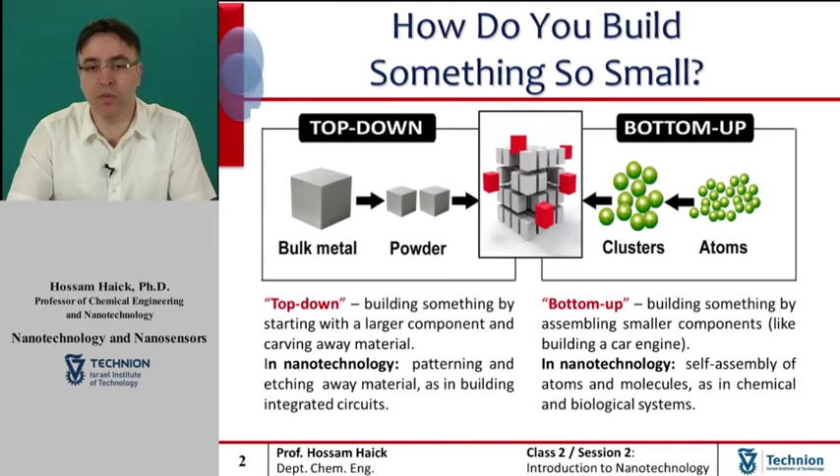Such bottom-up approaches should, broadly speaking, be able to produce devices in parallel and much cheaper than the top-down methods, but could potentially be overwhelmed as the size and complexity of the desired assembly increases.

Focused ion beam, also known as FIB, is a technique used particularly in the semiconductor industry, material science, and increasingly in the biological field for site-specific analysis, deposition, and ablation of materials.

FIB systems operate in similar fashion to the scanning electron microscope, which we have abbreviated so far by SEM, except the fact that FIB systems use a finely focused beam of ions, usually gallium, that can be operated at low beam currents for imaging or high beam currents for site-specific sputtering or milling.

At low primary beam currents, very little material is sputtered, and modern FIB systems can easily achieve 5 nanometer imaging resolution. At higher primary currents, a great deal of material can be removed by sputtering, allowing precision milling of the specimen down to a sub-micrometer or even to a nanometer scale.

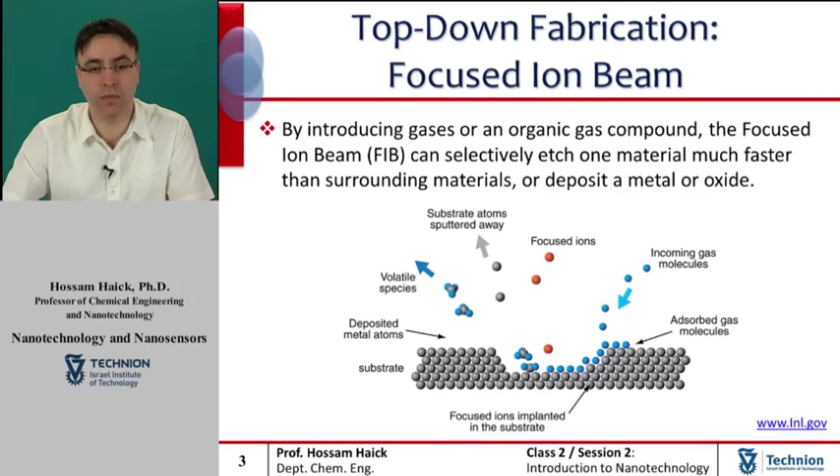If the sample is non-conductive, a low-energy electron flood gun can be used to provide charge neutralization. In this manner, by imaging with positive secondary ions, using the positive primary ion beam, even highly insulating samples may be imaged and milled without a conducting surface coating, as would be required in SEM.

Following is a short video that demonstrates the FIB operating along with animated presentation. Enjoy.

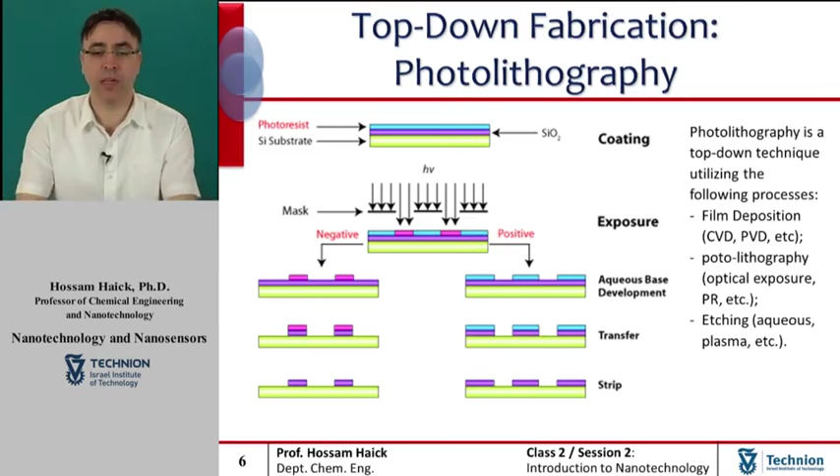Its main disadvantages are that the technique requires a flat substrate to start with. It is not very effective at creating shapes that are not flat, and it can require extremely clean operating conditions. Following is a short video that demonstrates the photolithography process along with animated presentation. Enjoy.

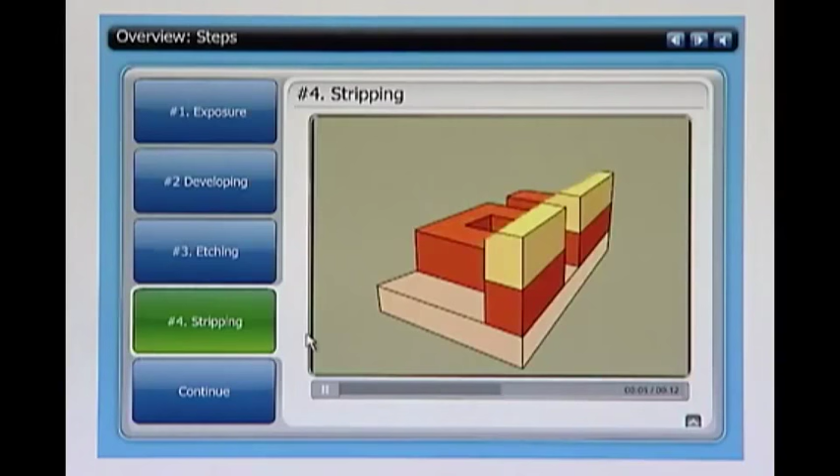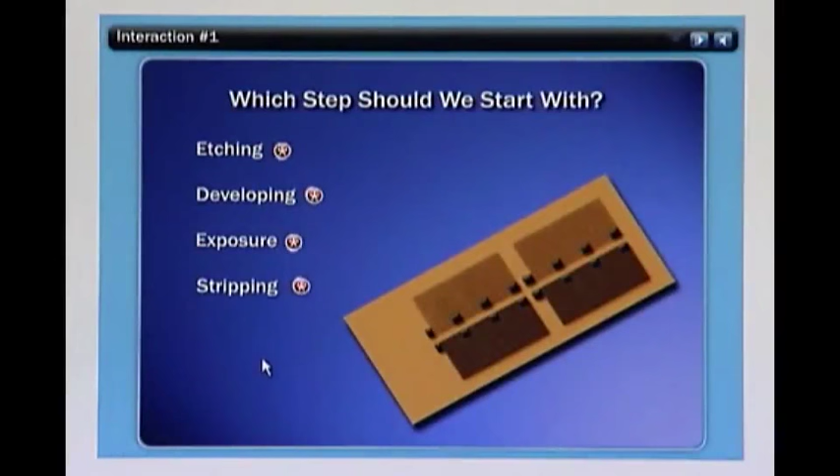We will move now to electron beam lithography. Electron beam lithography, abbreviated as EBL, refers to a lithographic process that uses a focused beam of electrons to form the circuit patterns needed for material deposition on the wafer, in contrast with optical photolithography, which uses light for the same purpose. Electron lithography offers higher resolution than optical lithography because of the shorter wavelength possessed by the 10 to 50 kilo electron volt electrons that are employed in this process.

Given the availability of the technology that allows a small diameter focused beam of electrons to be scanned over a surface, electron beam lithography does not need masks anymore to perform its task. An electron beam lithography system simply draws the pattern over the resist wafer using the electron beam as its drawing pen. Thus, electron beam systems produce the resist pattern in a serial manner, making it slow compared to the optical system.

A typical electron beam lithography system consists of the following parts. First, an electron gun or electron source that supplies the electrons. Second, an electron column that shapes and focuses the electron beam. Third, a mechanical stage that positions the wafer under the electron beam. Fourth, a wafer handling system that automatically feeds wafers to the system and unloads them after processing. And finally, a computer system that controls the equipment.

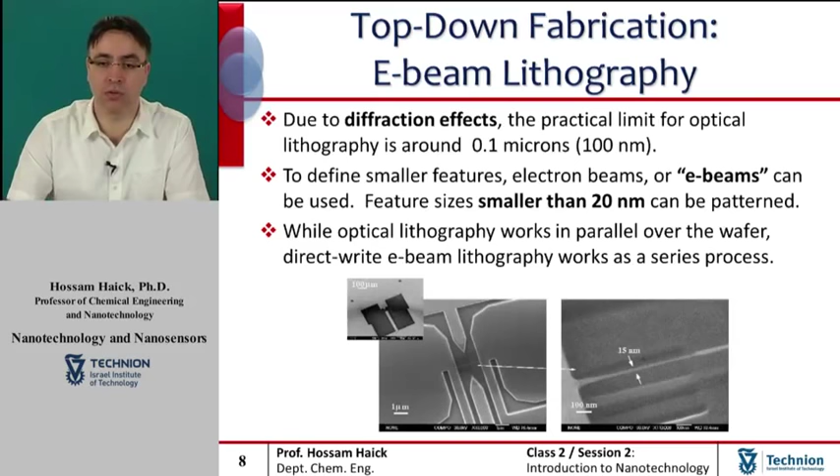The resolution of optical lithography is limited by diffraction, but this is not a problem for electron lithography, the reason being the short wavelengths exhibited by the electrons in the energy range used in electron beam lithography systems. However, the resolution of an electron lithography system may be constrained by other factors such as electron scattering in the resist and by various aberrations in the electron optics.

Just like optical lithography, electron lithography also uses positive and negative resists. The resolution achievable with any resist is limited by two major factors. The first is the tendency of the resist to swell in the developer solution, and the second, electron scattering within the resist layer.

The primary advantage of electron beam lithography is that it is one of the ways to beat the diffraction limit of light and make features in the nanometer region. This form of maskless lithography has found wide usage in photomask making for photolithography, low volume production of semiconductor components, and also for a lot of research and development.

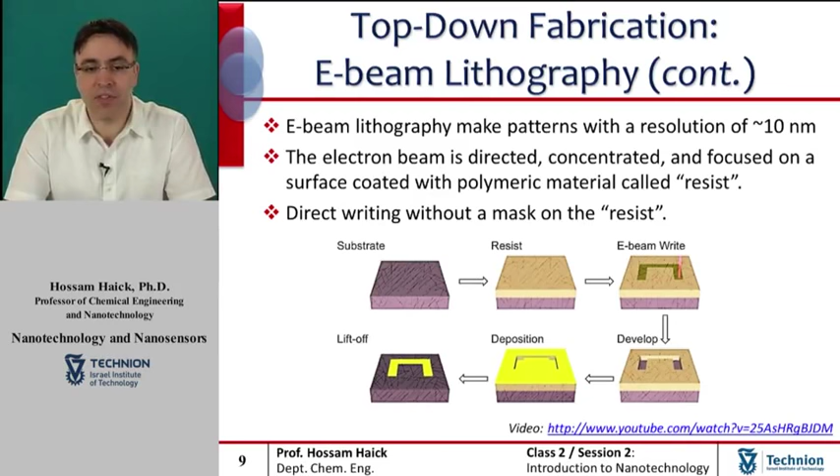The key limitation of electron beam lithography is throughput, namely, the very long time it takes to expose the entire silicon wafer or glass substrate. A long exposure time leaves the user prone to beam drift or instability that may occur during the exposure. Also, the turnaround time for reworking or redesign is lengthened unnecessarily if the pattern is being changed a second time.

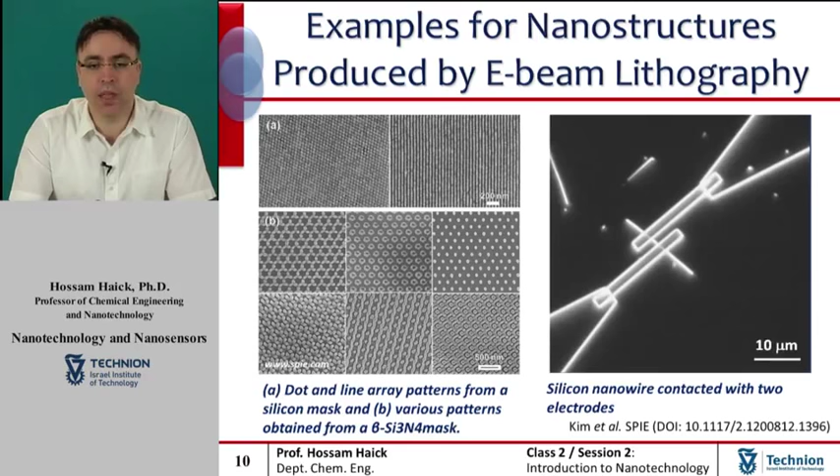The left side images demonstrate production level high-resolution electron beam lithography of lines and dots formed in a resist. In this example, 20 nanometer sized features were delivered, with pattern transfer capability for a wide range of materials. Nanometer level-to-level alignment accuracy is made possible by the in-house software and marker design used in these systems and samples. The right side image shows a single silicon nanowire contacted by two adjacent electrodes to enable measuring the silicon nanowire's electrical properties.